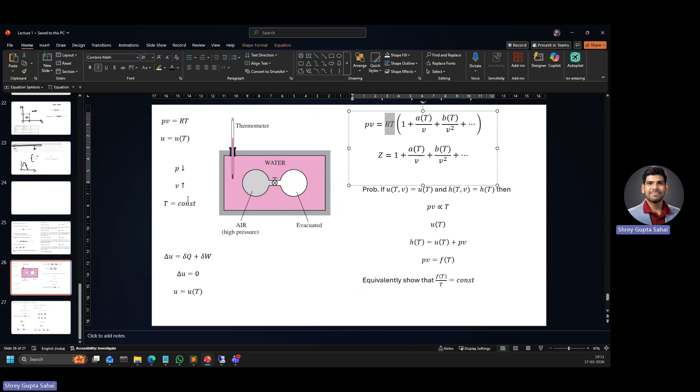So that is a very important thing. Compressibility tends to one. A dilute gas is always an ideal gas, if you're dilute enough. So that is what I wanted to say. Now, the reason why the van der Waals equation was such a breakthrough, I'm trying to claim, and the answer is it was the first of its kind cubic equation of state.

The first cubic equation of state. And to actually understand that, we will have to see how the PV plots look for an ideal gas. Okay. How do PV plots look for an ideal gas? So how do they look? They look something like this.

These are hyperbolas, right? What are our x and y? Let's say x and y is P comma V. Yeah, that's better. P and V. These are different isotherms. Now our statement is that this kind of fails near the saturation dome. So near the saturation dome, if you go closer, this thing fails. Now what happens near the saturation dome? So let's look at what happens near the saturation dome. This is an important thing. It might not be clear to you, but for someone who has looked at isotherms on our PV plot, this is how it looks.

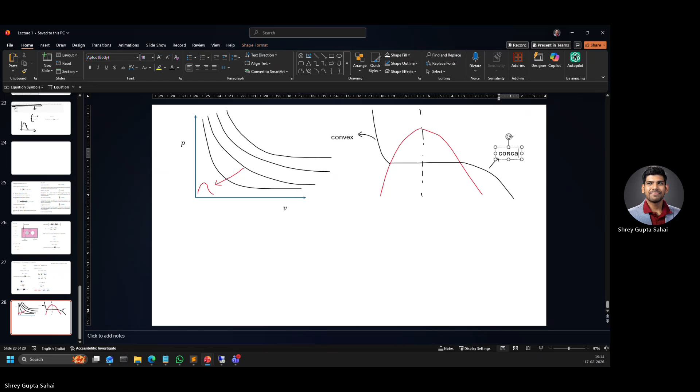Something like this. So in the subcooled region, what we see is that this line is a convex curve. This is convex. Okay, let me write that. And in this part, it is concave. Okay, what do I mean by concave and convex? This is positive. This one is negative. And then there is a transition that happens.

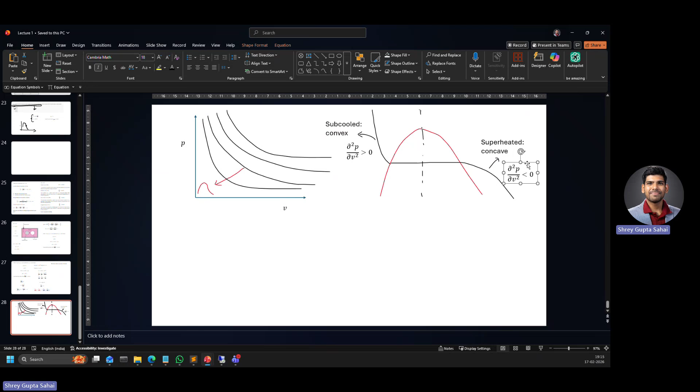Just for my benefit, let me draw this line which joins these two curves. Inside the dome, things are not very clear. We don't want to say what is going on, although this is a straight line, we know that. But let's say we don't know what is going on inside the dome, and we are saying that once the gas is left of the dome, it has a convex shape, and right of it, it has a concave shape. Do we know any functional form which possesses the property that its form towards the left is convex and then towards the right is concave?

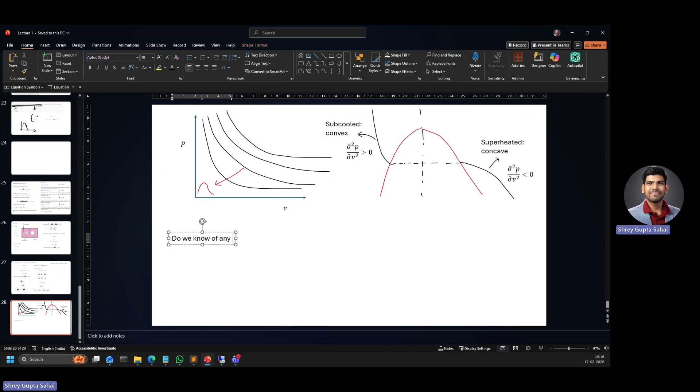And I asked a simple question. Let me type this. Do we know of any simple functional form to represent this behavior of a curve changing its shape from convex in the left to concave in the right?

Okay, and just so that you might not think that I'm making these things up, let me show you some real figures to back my claim. Let me quickly show that part also. It's somewhere here.

Right. So it's somewhere here, okay? One important thing which I forgot was these are isotherms, okay? We need to kind of note that. So these are real isotherms, okay? What you see here are real isotherms, and this is for nitrogen, okay? Let me paste this.

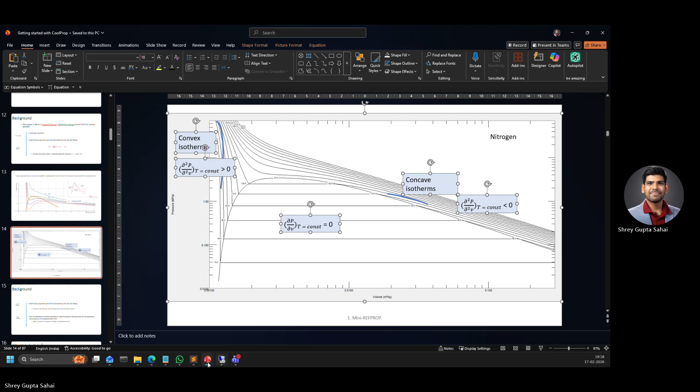So what you see is that this kind of has this behavior, and for ideal gases or for regions which do not touch the saturation dome, this thing does not follow. So for this, y times x equals 1, right? What happens here? What is dy by dx? Dy by dx is minus 1 by x. And then d square y by dx square is 2 by x square, right? It's always positive. That is an important thing.

So this behavior of convex to concave is only happening for lines which touch the saturation dome. You can see the critical isotherm. At that point, you don't have that feature. That feature is lost. Okay, so it is always convex. Convex is this. Concave is this. So what we can see is that for isotherms which won't touch the saturation dome, all have a convex shape, right? This is a convex curve, right?

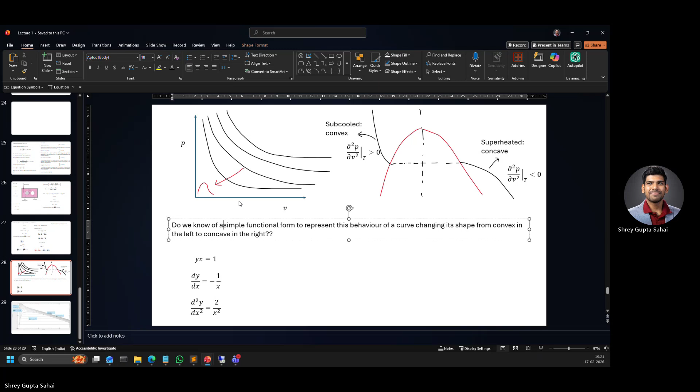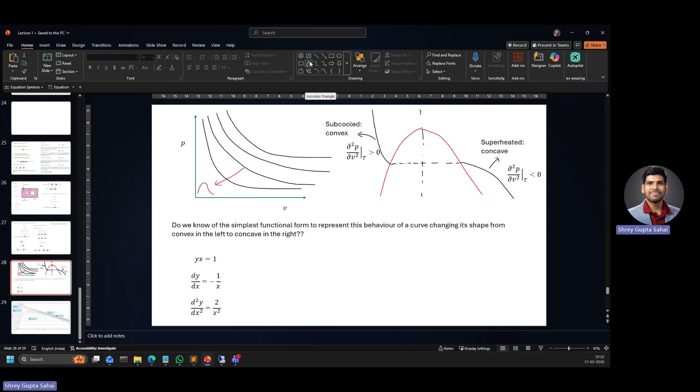Now coming back to the question, if we want to capture this feature that isotherms are convex in the subcooled region and then become concave in the superheated region, do we have a functional form to represent this? And probably a very simple one, the simplest one. Let's rely on the polynomial forms.

Does y equals x have this feature? No, right? It's neither convex nor concave. It's a straight line. These values are zero. Okay. What about y equals x square? We know that there is a root at x equals zero, so we can say it's a midpoint of this curve. On the right hand side, it's convex. On the left hand side, it's also convex. So again, this thing does not follow. But what about y equals x cubed? Let me plot y equals x cube and y equals minus x cube. Would that not look like this? These are the two lines. Something like this. Convex, concave.

One important thing which people realized very early, and this is specific volume, this is P, was that if we want to mimic the behavior happening, at least not inside the dome, but near the dome, what we need to do is write a cubic equation when expressing pressure in terms of specific volume. Okay, in general. There is another important thing to note here. How many roots can y equals x square have, or a linear function?

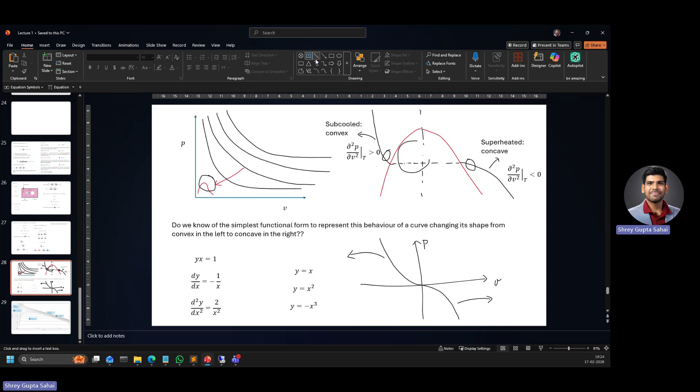This one can have one root, right? This one can have two roots. Precisely what we are looking for. We need two roots also, not two equations. We need two roots here. What does y equals minus x cube give you? It also gives you three roots, right? It gives you an extra root. Do we need that third root? No, right?

Now, here is my proposition. You have this PV plot, right? And you have a cubic equation. Now, I will not simply assert minus x cube, but ax cube plus bx square minus cx plus d will roughly look like this, right? For a particular, let's say, y equals p sat, we have three roots, right? This one, and this one. My proposition is, let's keep this root, let's keep this root, and let's cancel this one, and say this is my VF, this is my VG.

This construct has the property of a convex curve to my left of my VF, concave to my right of my VG, and this I'll kind of delete. I will not treat the region between these two, kind of neglect it. And this seems to be an ad hoc approach, kind of forcing this, right? X cube gives you three roots. It does not give you two roots, kind of forcing it. But still, we are not essentially after the roots themselves, right? But an important feature which x square cannot give you is the variation in the slopes, or the second derivatives of isotherms. It's only the cubic equation that can give you that.

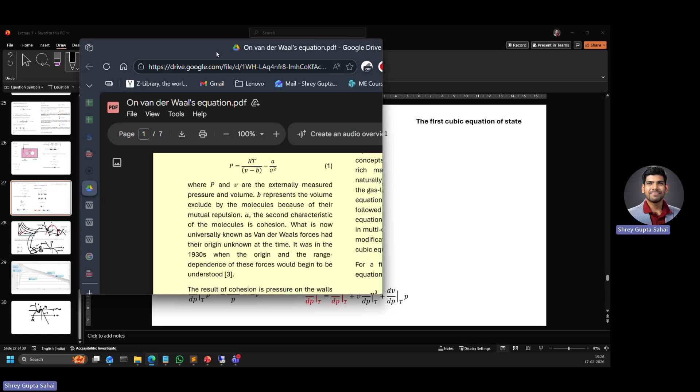And so what you will notice, no matter where you are, whatever equation of state you're using, the majority of them will be cubic equations of state. So they turned out to be very successful. That is what I'm trying to say. They turned out to be very successful. And the first cubic equation of state was the van der Waals equation of state.

So he kind of started an entire can of gas models to be able to write property variations near saturation domes. Okay, so there are all kinds of these, and these are all cubic equations of state, right? So when you try to solve something like p equals p sat, you have three roots. What do you do of the third root or the middle root? The ad hoc thing to do is we kind of neglect that. We don't deal with it.

And to be honest, let me talk to you about it. It's not that a cubic will always have three roots, right? It might have only one root, or it has to have three roots, because the condition is that you have to either have one real root or three real roots, right? You cannot have two real roots and just go with it. That is not possible. So that is one thing. So essentially what we do is we neglect this third root or the middle root.

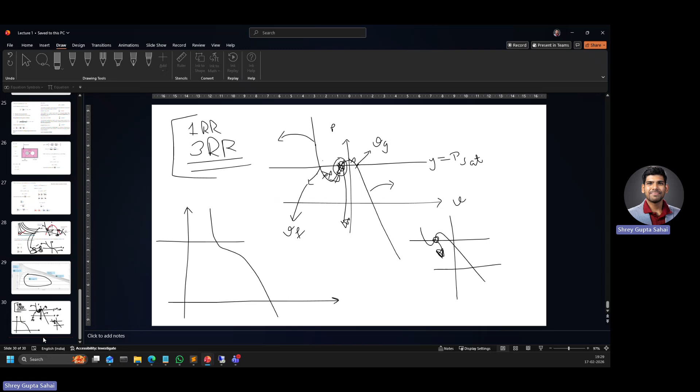Do I have something else to show you guys? Right, one more thing. Yes, indeed. One important thing to note is that you can actually use the critical property. As I mentioned, let's note this here. If I draw a y equals constant line in this region, you note that you get two solutions, right? For a single isotherm, you get two solutions. But above the dome, you get a single solution.

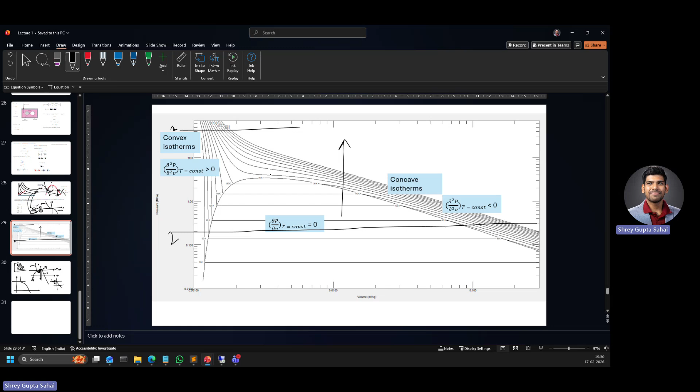If we neglect the third root, this is the exact feature that cubic equations of state also offer. Either you will have three roots or one root, which suggests that our equation of state is also capable of predicting what is happening near the critical point. So that was also an important thing that we noticed. And van der Waals actually could calculate the values of his coefficients A and B. I've been using the notation A and B, but A and B are van der Waals constants. He actually derived these based on the critical properties of the gas. So let's do that.

Actually, as I was mentioning to you guys, this concavity and convexity. At the critical point, to the right of the critical point, del square P by del V square is negative, but on the left it is positive, which dictates that at the critical point, this should be zero. It's a very well-known fact that the critical point is an inflection point. Another important thing to note is at this point, it touches, it does not cross, the saturation dome. This is the point at which Vf equals Vg, so this also dictates that the slope of the isotherm dP by dV should also be zero.

Using these two conditions and applying them to the van der Waals equation of state, we can substitute for A and B to get our critical properties. So I'll just quickly show that to you, and then maybe we can close for today. We'll do the problems, whatever problems you would like to do, if you guys are available. Next time we will solve some problems. So just let me show this part to you, and then we'll close.

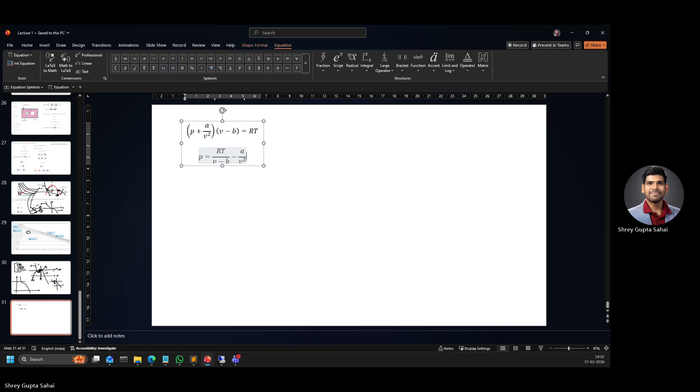Okay. So (P + A/V²)(V − B) = RT. Now I write P = RT/(V − B) − A/V². So now what is dP/dV? I'm saying T equals constant, so let me write T critical. Then dP/dV will become −RT_critical/(V − B)² plus 2A/V³. The second equation, as I said, is over the inflection point.

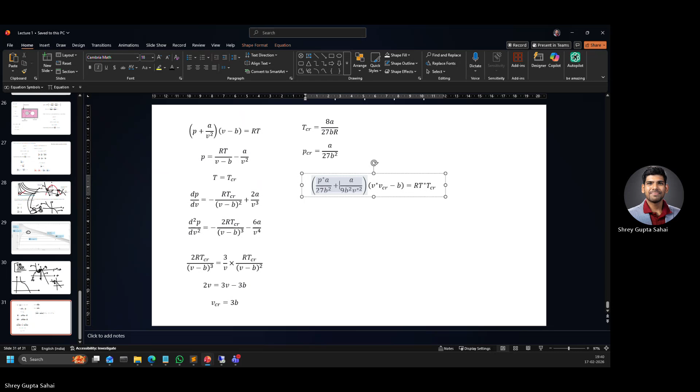Now let's start substituting things. You see A by 9B square, what is this? This is A by 27B square. V critical is 3B. What is T critical? T critical is 8A by 27RB. Now see how R gets cancelled. So the dependence on the molecule species, if it is oxygen or something, gets quickly cancelled out because R gets cancelled. Now, this B you can take common. So this becomes 3V star minus 1.

You have taken a B common, so you multiply it in here, and now you take A by B square common here. A by 9B square you take common. This is P star by 3, I think. Now if I cancel the common terms, 8 will remain, this will be 8 by 3. Let me also take 1 by 3 common. So this will become P star, and T star remains. So essentially what I'm writing here is 8T star divided by (3V star minus 1) minus 3 by V star square, isn't it? And what is this? This is P star.

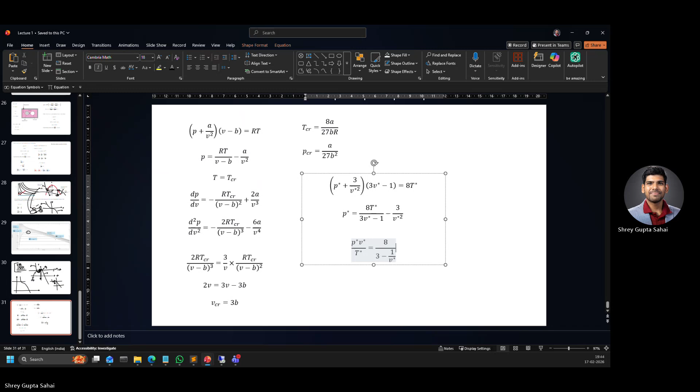This you will get 8, 3 minus 1 by V star, isn't it? Minus 3 by V star.

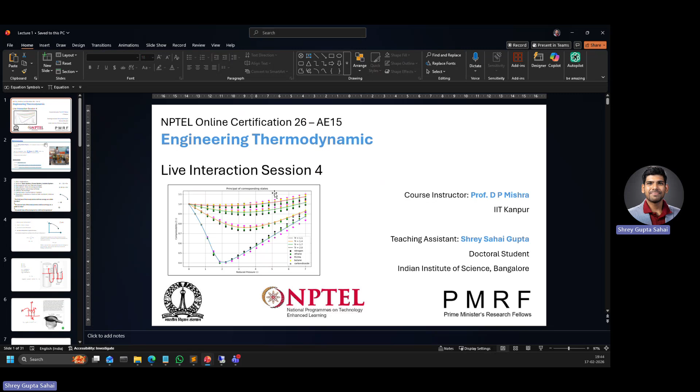This is the equation which I showed to you when I was discussing this at one point. This is essentially the principle of corresponding states. It explains why, upon reducing the pressure and temperature with respect to their critical values, all gases must behave roughly similarly. It tells you that Z is a function of reduced pressure, and I can quickly substitute V in terms of P and T, and at different reduced temperatures and various reduced pressures, this is what I will get.

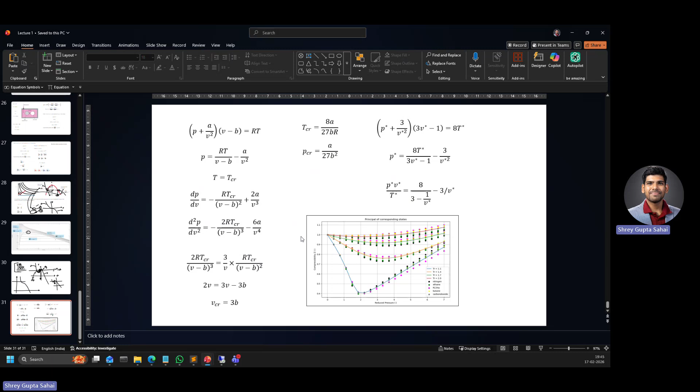This is what is there, okay? If you want to see this, should we see this? We have some time. Let's try to see this. Let me first see if I have done this correctly. So T star I have to take common. T star was not here. I have to have T star here also, right? And then V star you take common, so you get this. Okay, this is fine.

Let me quickly show it to you. Let's say our T star is 1, and I'm varying P star, so P star becomes X, okay? Now I need to plot y. What is my 1 by V star? So 1 by V star is something that I need to find. This is a little problematic because this is a cubic equation in V. So finding solutions to that has to be done graphically or numerically. But rest assured, we can do this.

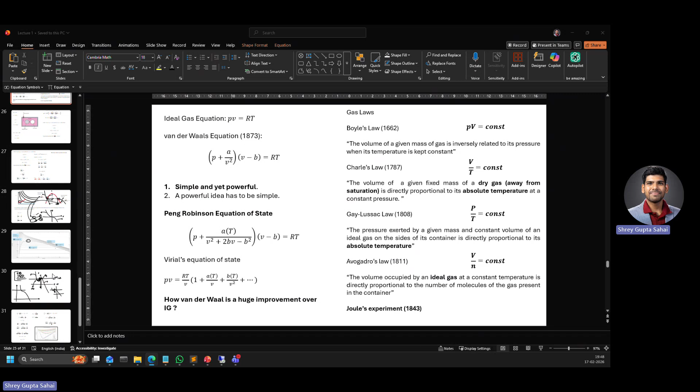And that was the interesting part about van der Waals equation of state. Another important thing which I just quickly checked is the critical compressibility value. It's actually 3 by 8. What is 3 by 8? If you put in all the values, P critical times V critical by R times T critical, you will get the value as 3 by 8. 3 by 8 is 0.375.

Van der Waals equation of state says that your critical compressibility factor should be 3 by 8. For sure, this is a high value. The actual compressibility factors are much, much lower. But anyway, it is able to predict non-unity compressibility factors close to the critical point or close to saturation domes. I didn't go into the depths of what is essentially done with the third root of the cubic equation, and it explains a lot of things. It even explains metastable states. So this third root hints at the metastable states. I didn't talk about it. Probably we don't need to talk about it too much.

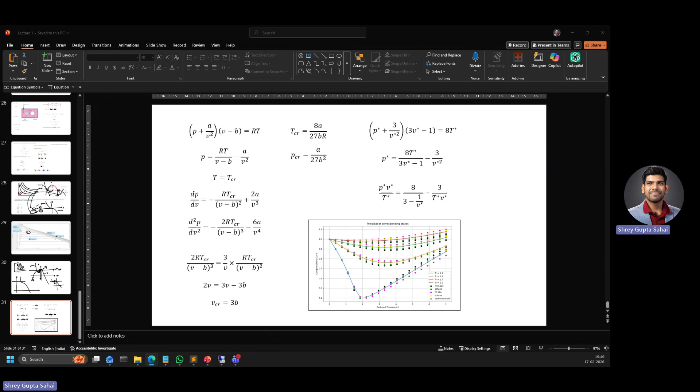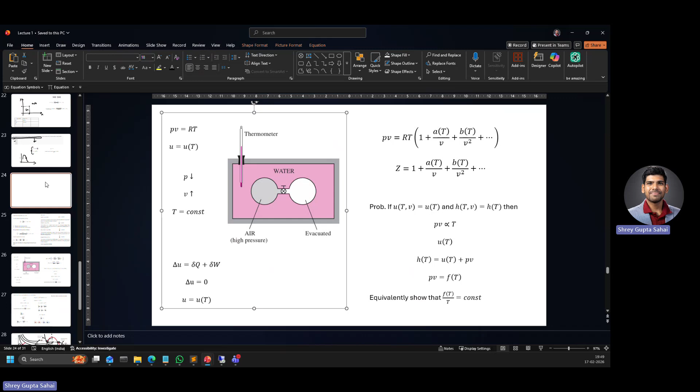We have already gone too far away from the general discussion of the video lectures. But I took this time because not a lot of people had joined today. I took this class as a detour to show you that there is so much that we are not discussing, and this is just the tip of the iceberg that we are discussing in these video lectures. I hope this was an interesting discussion that I carried out today.